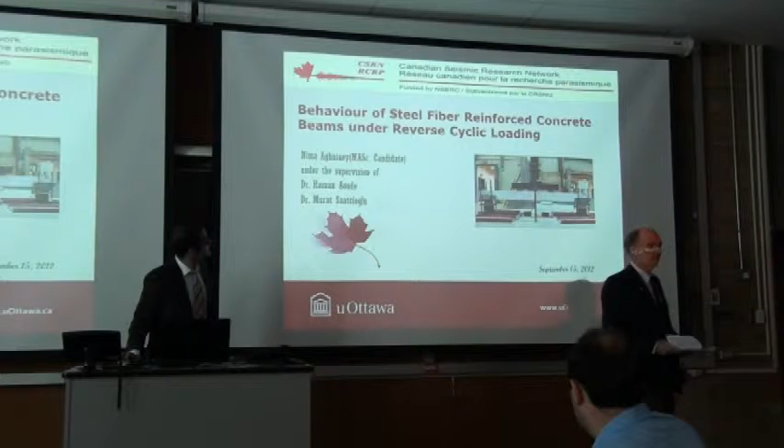Hello everyone, my name is Nima Aghniaey. I'm a master's student at the University of Ottawa, and today I'll be talking about my experimental project: the behavior of steel fiber reinforced concrete beams under reverse cyclic loading.

First, I'm going to give you a little background information, then we're going to move to the use of steel fibers in beams, then discuss my experimental program, and then talk about the results and some conclusions.

Steel fiber reinforced concrete has been around for about 20 years now, and it's basically a composite material composed of regular Portland cement concrete and short discrete steel fibers. As you can see, they come in different types and shapes, with different cross sections and different length or geometry.

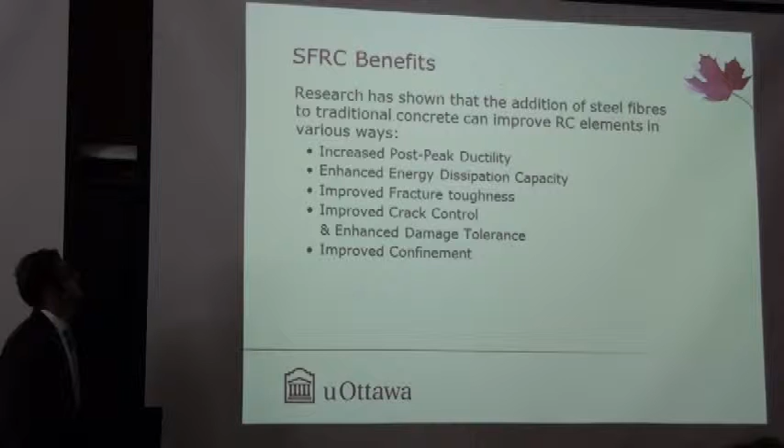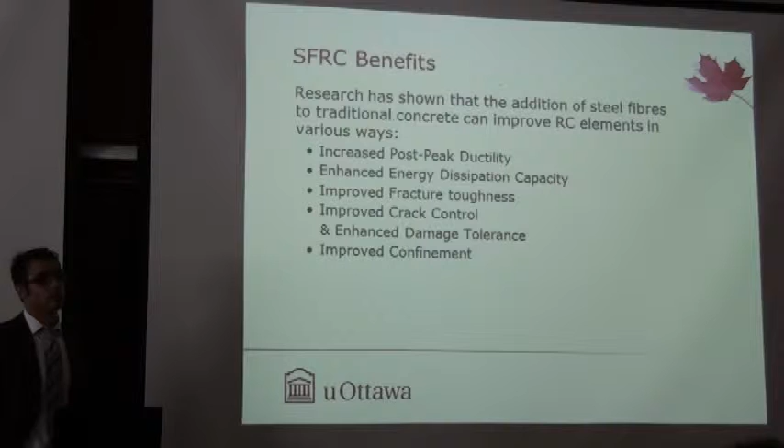The benefits of SFRC has been shown in several past research studies. It's been shown to increase the post-peak ductility, the energy dissipation capacity, improve the fracture toughness, and also improve the crack control and damage tolerance of structural elements. It also improves the confinement of structural members.

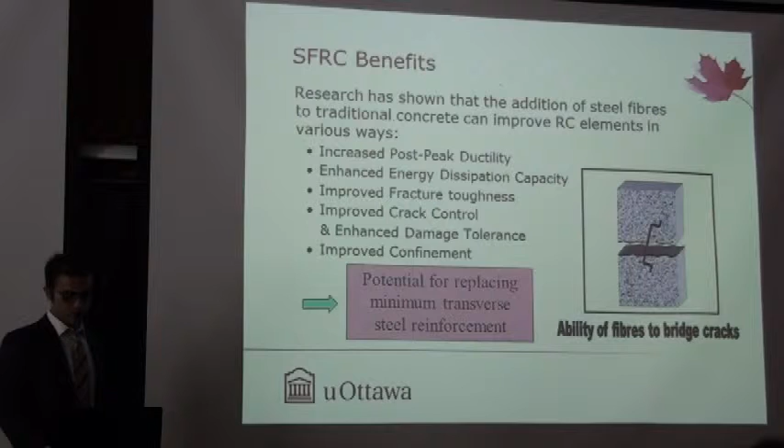Fibers have the ability to basically bridge cracks, which prevents the cracks from opening up, which increases the tensile strength of concrete, and it also has a potential for replacing traditional transverse reinforcement in concrete structures.

The objective of my research program was to study the effects of steel fibers in beams under reverse cyclic loading, and also to examine the potential of steel fibers to replace transverse reinforcement.

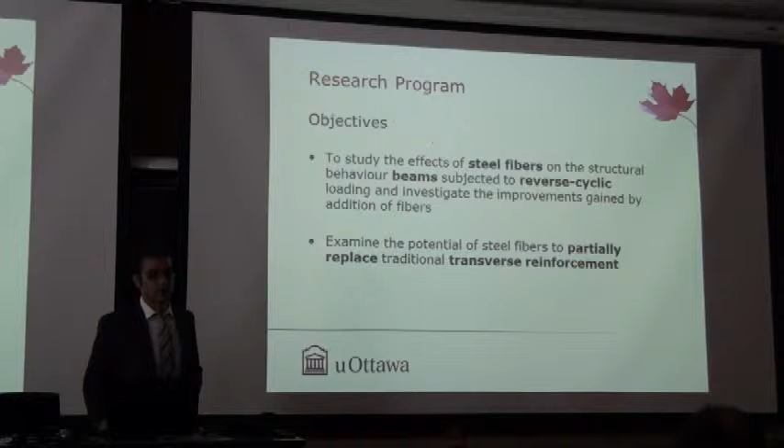As in most experimental research programs, we had to prepare the beams as testing specimens. So we started with the beam design, built the formwork and the reinforcement cages, and did the casting in the structural lab at the University of Ottawa. Then we did the instrumentation for measurement devices, the loading setup, and then started testing.

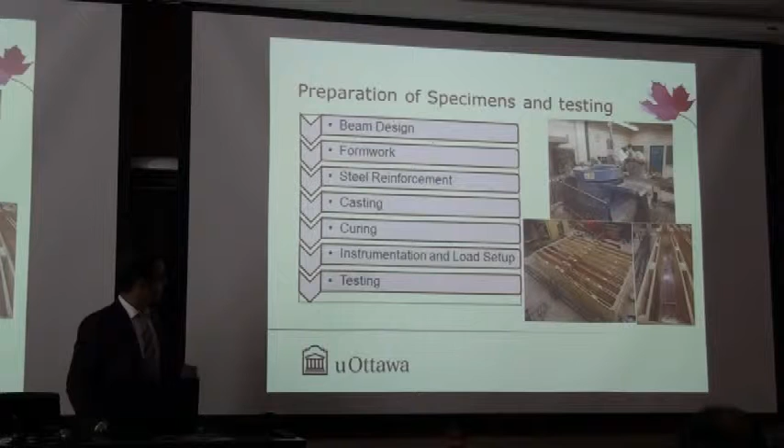You can see my formworks and cages in the bottom there, and the mixer that I used for preparing the beams.

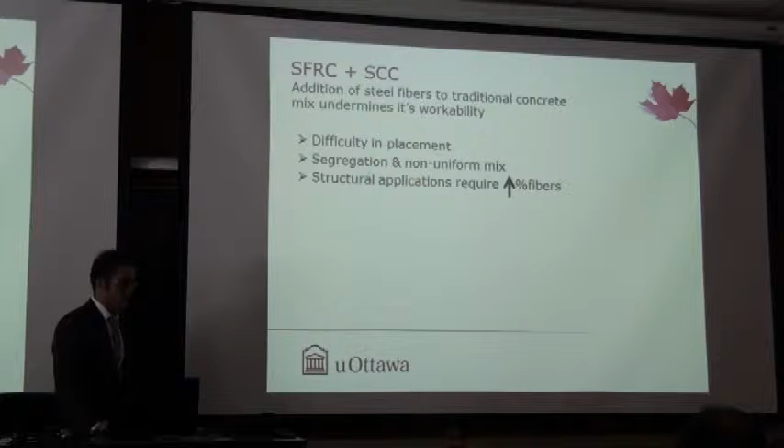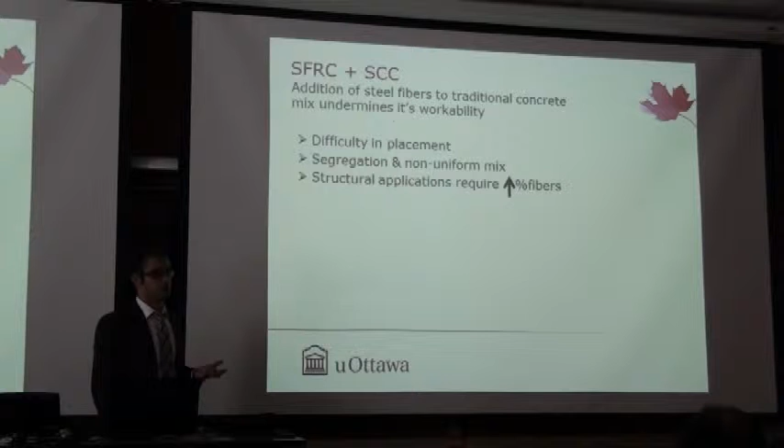SFRC and SCC. SCC, as you probably know, is self-consolidating concrete, and SFRC is just normal concrete with steel fibers added to it. But the problem with SFRC alone is that when you add steel fibers at higher contents, it loses its workability, so it's hard to work with in most structural applications, which require around 1 to 1.5% steel fibers.

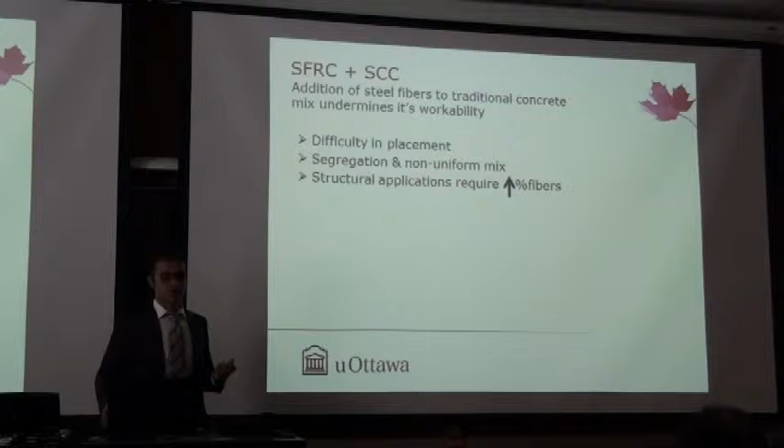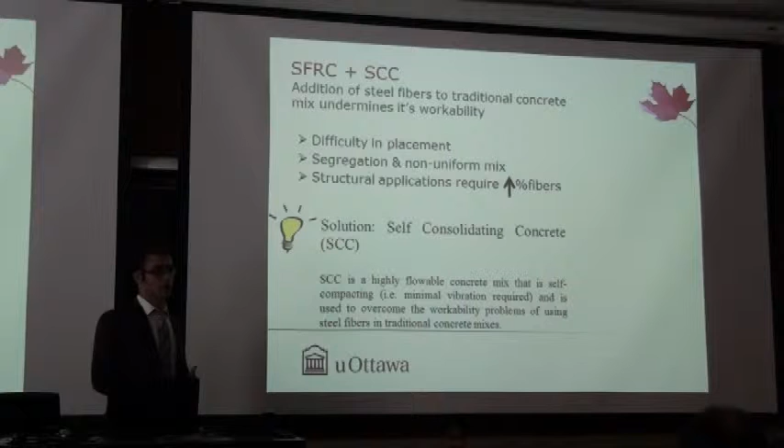To solve this problem, we combined the SCC with steel fibers, which gave us a more workable mix with a bunch of benefits. It was very workable, you could use it in a lot of different structural applications, and you needed a lot less vibration.

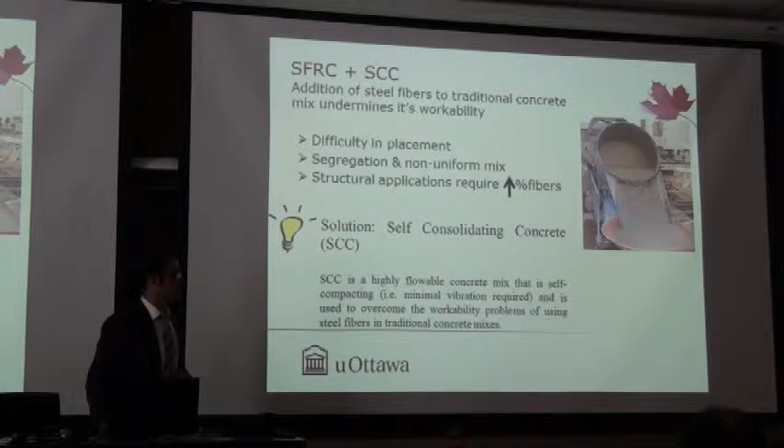You can see that's a slump flow test, which is usually conducted to measure the workability of the SCC, and that's when we're doing the SCC mixes.

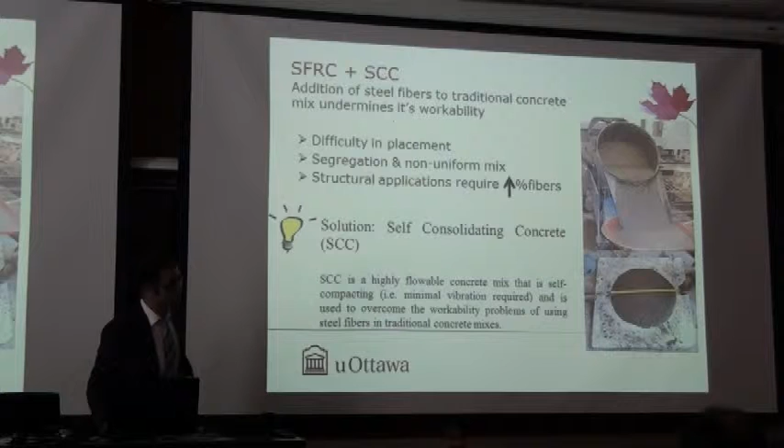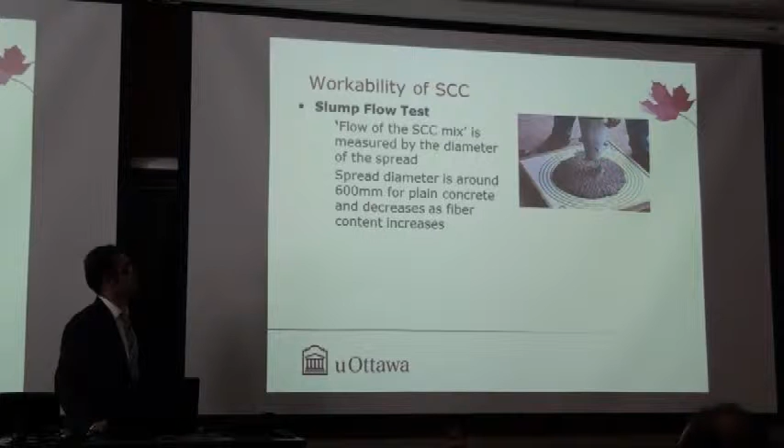As I mentioned, the slump flow test is used to quantify the workability of SCC mixes. You basically measure the diameter of the spread, and for normal SCC with no steel fibers, the diameter of the spread is about 600 millimeters.

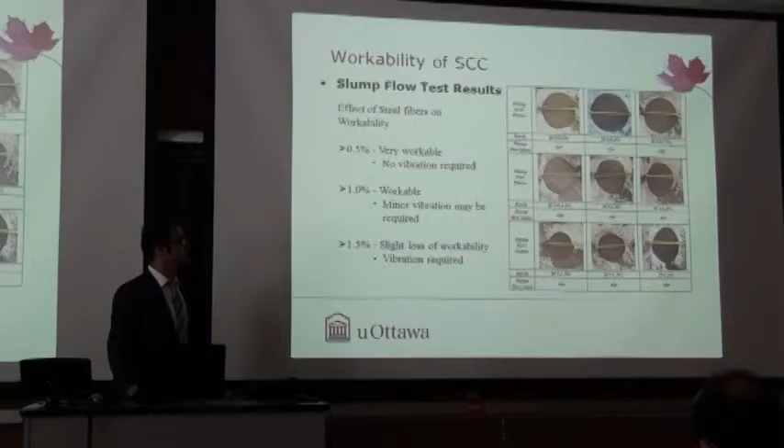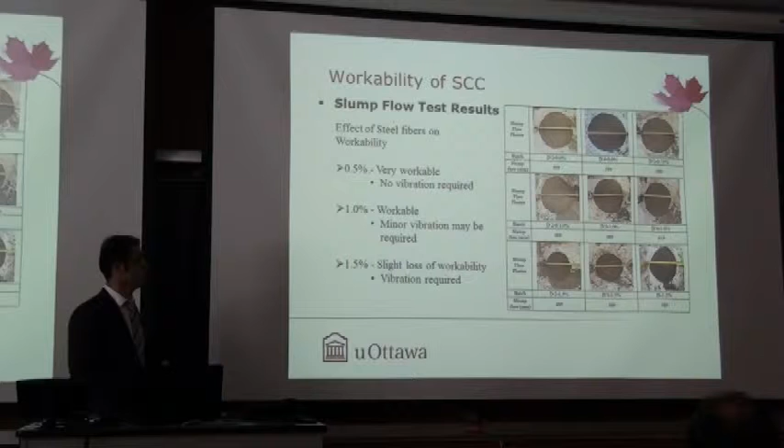When you add steel fibers, it reduces to about 400 to 500 millimeters, depending on the amount of fibers. At 0.5%, it's very workable, no vibration required. At 1%, it is still workable, minor vibration may be required. And at 1.5%, it loses a little bit of workability, and you will need vibration during casting.

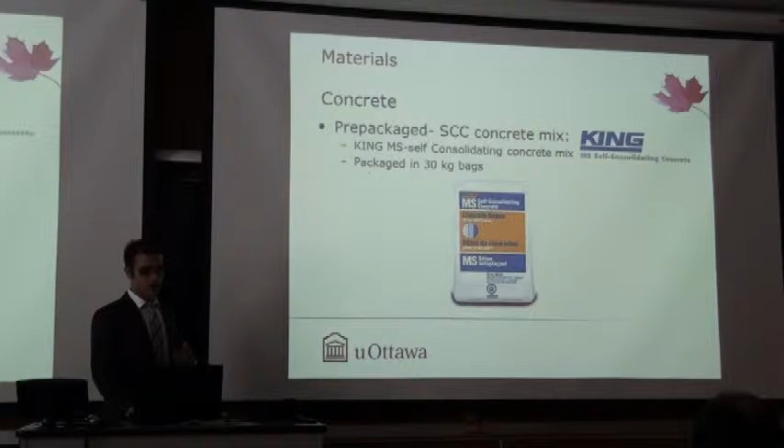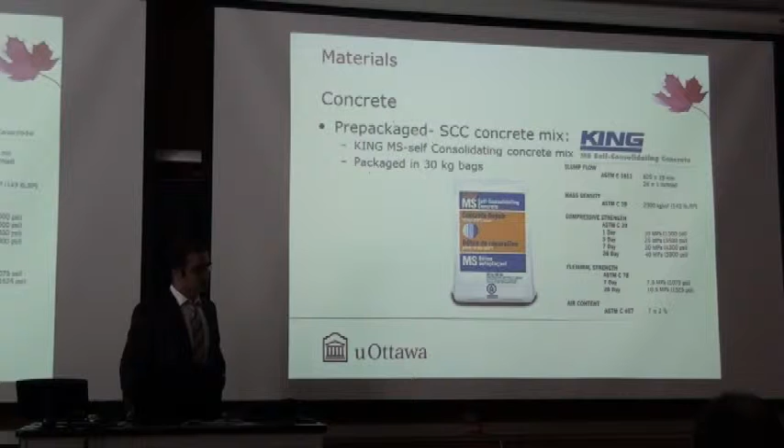We used the King MS SCC concrete mix, which came in 30 kilogram bags. It's pre-mixed, so it's pretty easy to work with - we basically add water to it and cast the beams. Here are some details of the mix.

We used hooked end steel fibers, Dramix ZP305 type. Tensile strength is pretty high, 1,345 MPa. The length is 30 millimeters, diameter of 0.55 millimeters, which gave us an aspect ratio of 55. It also came in packages of 20 kilograms.

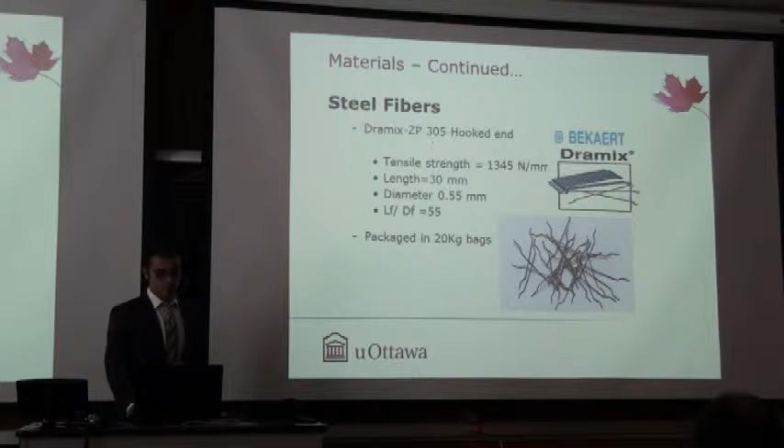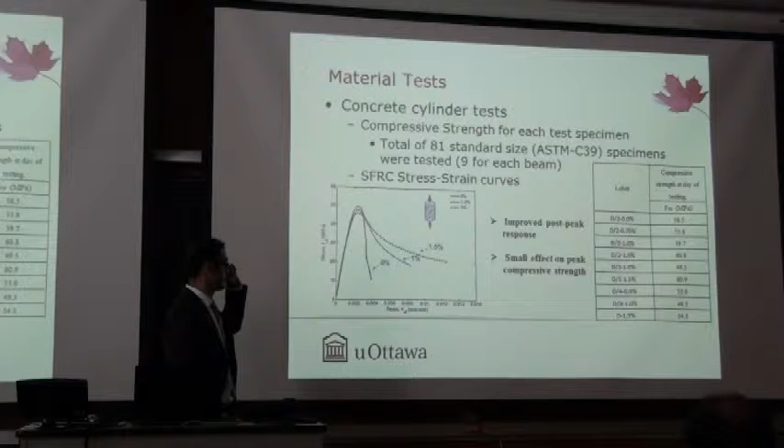We did some material testing. Basically, we did 81 standard size concrete cylinder tests, and we also got some full stress-strain diagrams for the concrete tests. You can see in that table the compressive strength for the concrete used in all of my specimens, and also this stress-strain diagram.

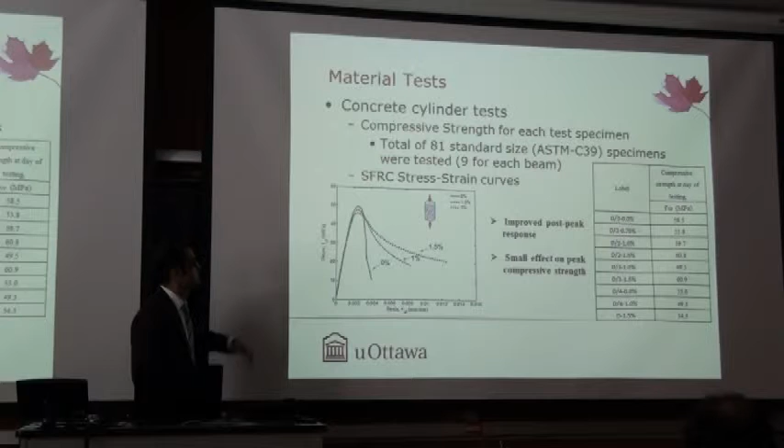You can see the improvement in the post-peak behavior of the SFRC, with the most improvements in concrete with 1.5% steel fibers.

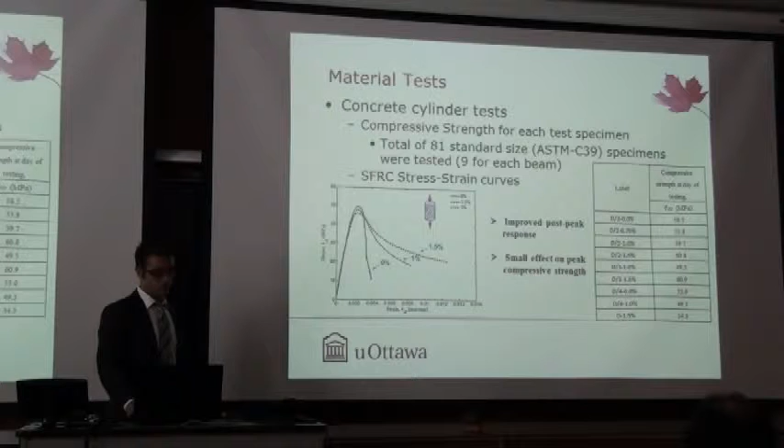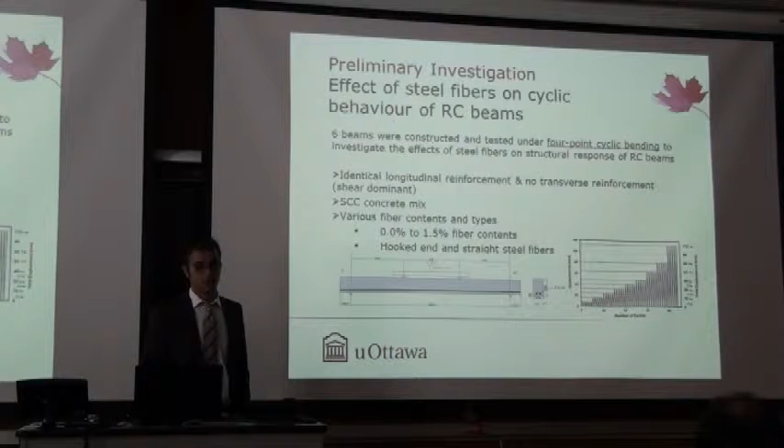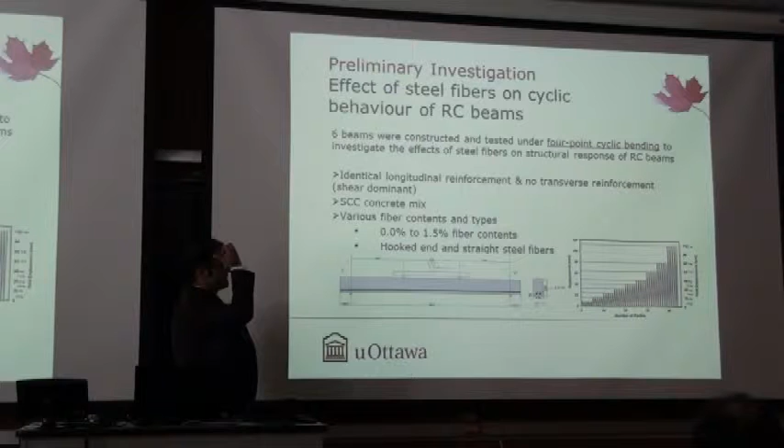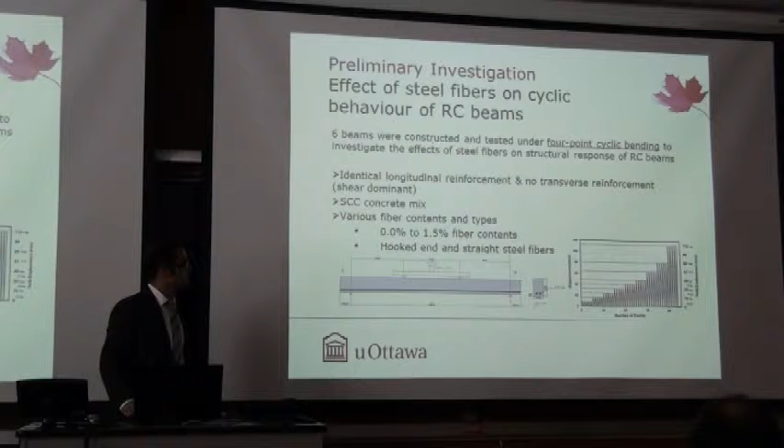Before starting my main experimental program, we did some preliminary investigation. We tested 6 beams with different steel fiber contents and different fiber types - hooked end and straight steel fibers, and 0% to 1.5% fiber contents. It was a cyclic loading test, so it was loading and unloading in one direction only.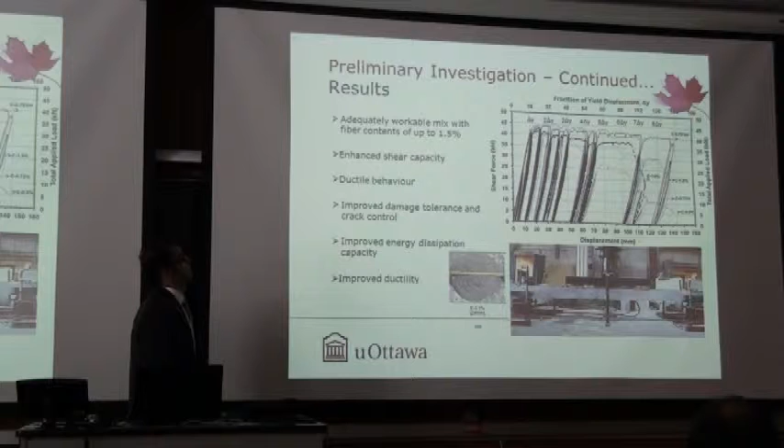Here you can see the cyclic load displacement curves. We observed a huge, significant improvement in the shear capacity of the beams because of the steel fibers. There was an improved energy dissipation capacity of all beams reinforced with steel fibers, improved ductility, improved damage tolerance and crack control, and more ductile behavior.

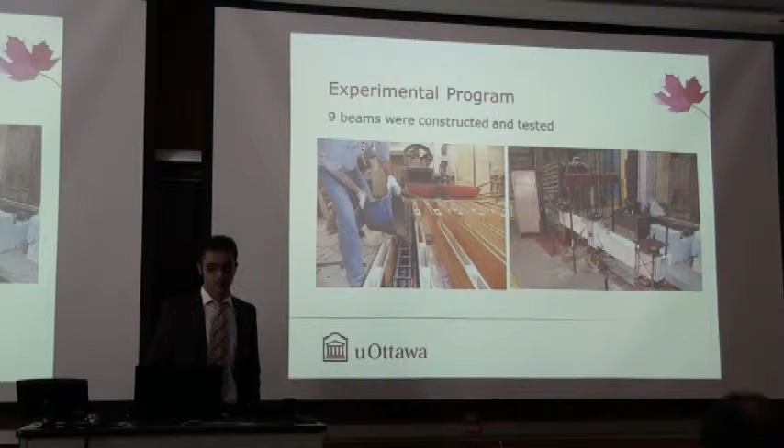My main experimental program consists of constructing 9 beams with different steel fiber contents, varying from 0% to 1.5%. We constructed 2 control specimens with 0% fiber, with identical longitudinal reinforcement.

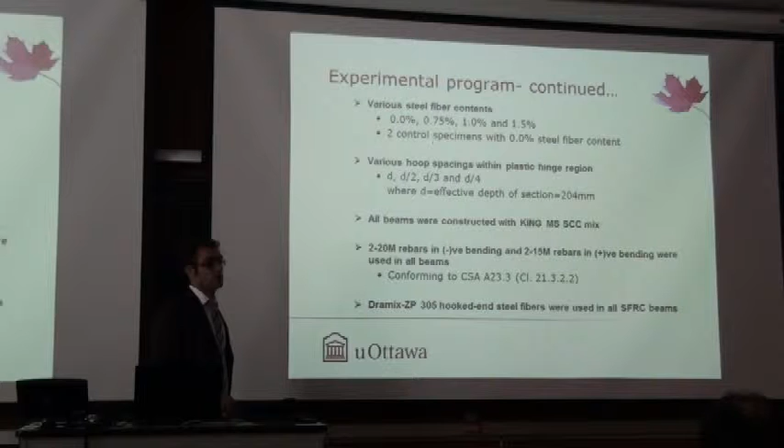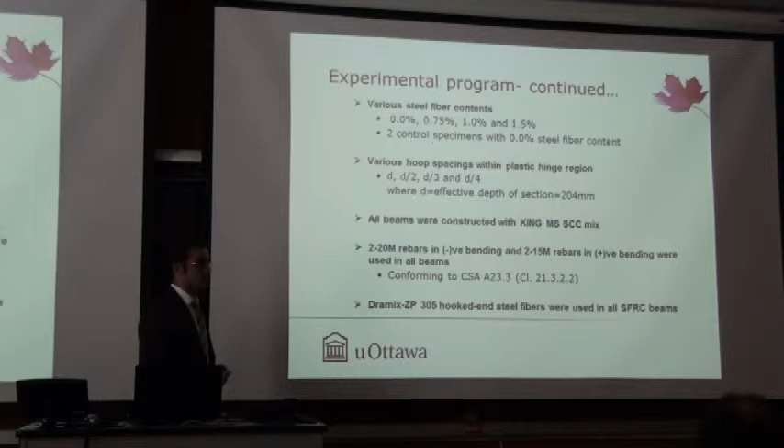We also used various hoop spacings, varying from D to D over 4, where D was the effective depth of our section, around 204 millimeters. This was to investigate the effects of hoop spacing on the properties of the structural section as well as the effect of the steel fibers.

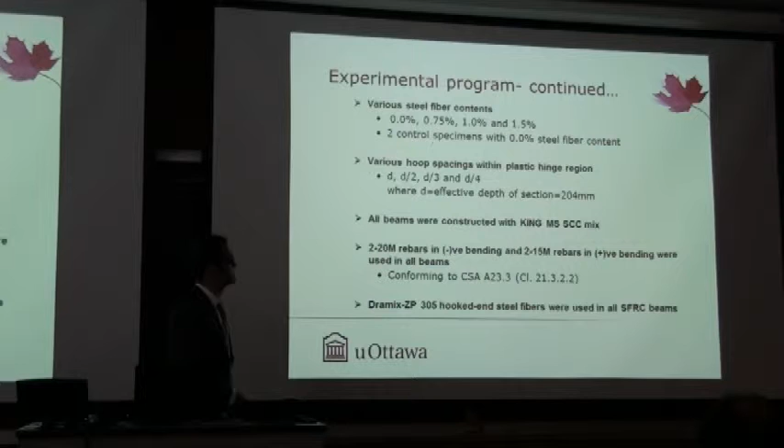As I mentioned before, we used the King MS-SCC mix and the Dramix ZP305 hooked end steel fibers. We only used one type of steel fibers in all of our beams. All of the beams were designed to conform to CSA A23.3 clause 21.3.2.2, which basically states that the positive

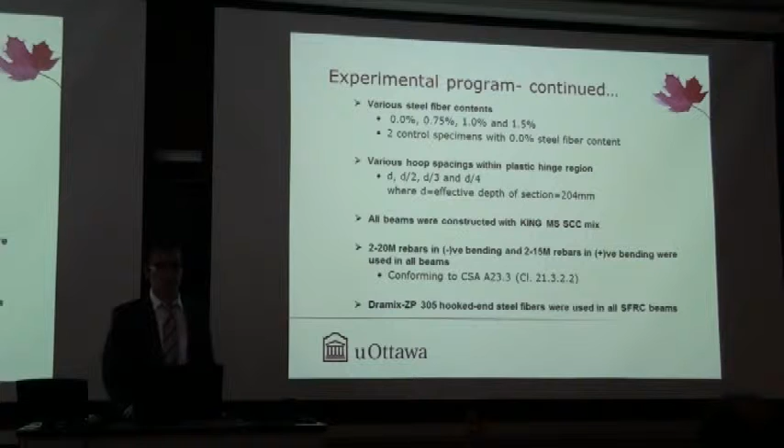We placed steel strain gauges in the longitudinal steel reinforcement as well as the hoops. We had displacement cable transducers to measure the rotation of the plastic hinge as well as the rotation due to anchorage slip and the shear deformations. We also measured the vertical deformation.

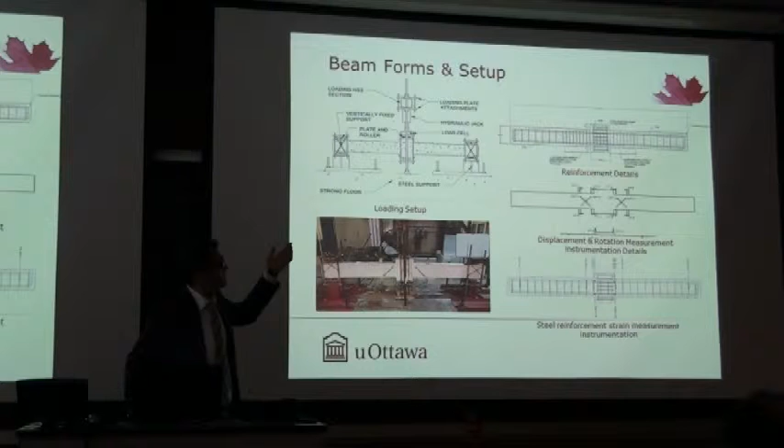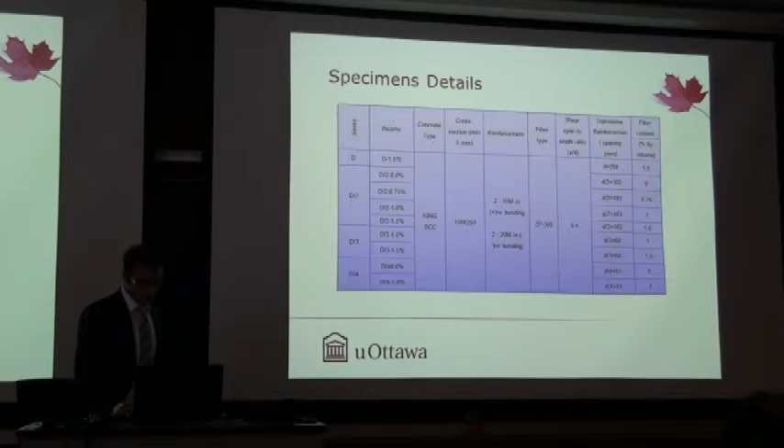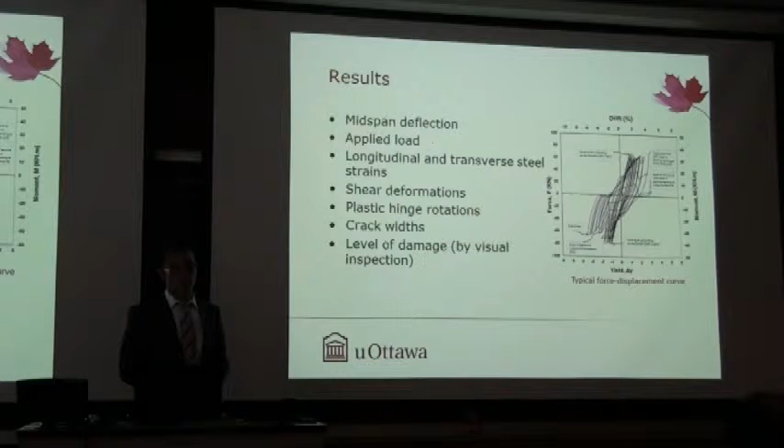As far as the results, we obtained a lot of data from tests, including midspan deflections, the applied load, which was measured by means of a load cell, longitudinal and transverse steel strains. We measured shear deformations, plastic rotations, crack width, and also assessed the level of damage to our specimens by visual inspection.

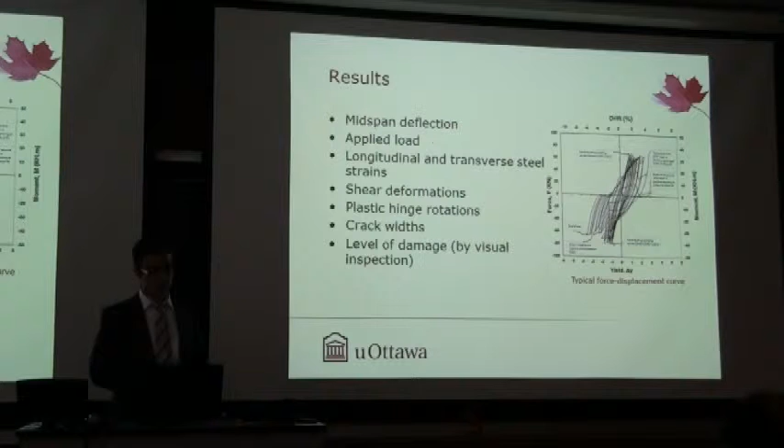As a first step, we did the load force displacement, and by doing that we tried to compare the improvements resulting from the application of steel fibers. Those are the force displacement diagram areas, basically areas enclosed by force displacement diagrams for my D/2 series, and we observed that the energy dissipation capacity for beams with higher steel fiber contents increases.

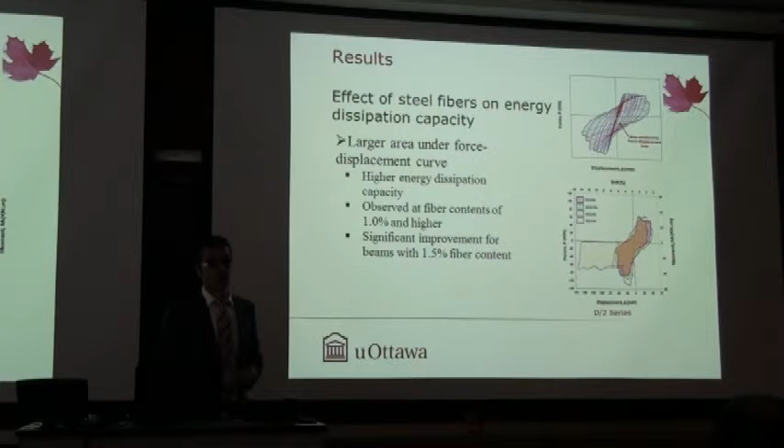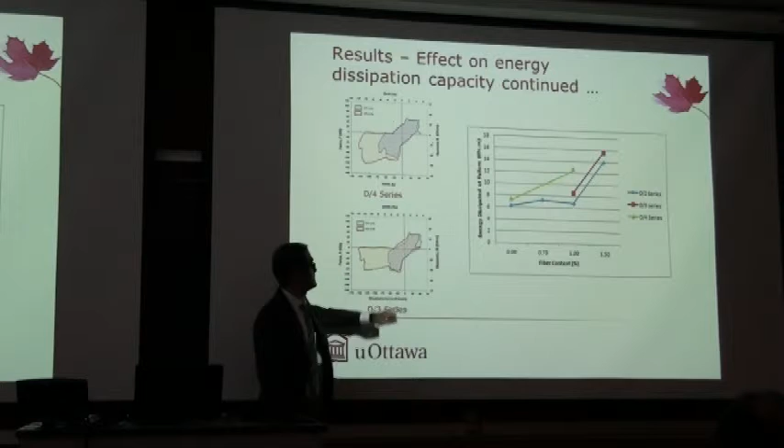As you can clearly see in the diagrams for my other beams, the hoop spacings are the same, and we are only increasing the fiber content. As you can see, the area under this diagram, which is my D/3 beam with 1.5% fiber, is a lot larger than my D/3 beam with 1% fiber.

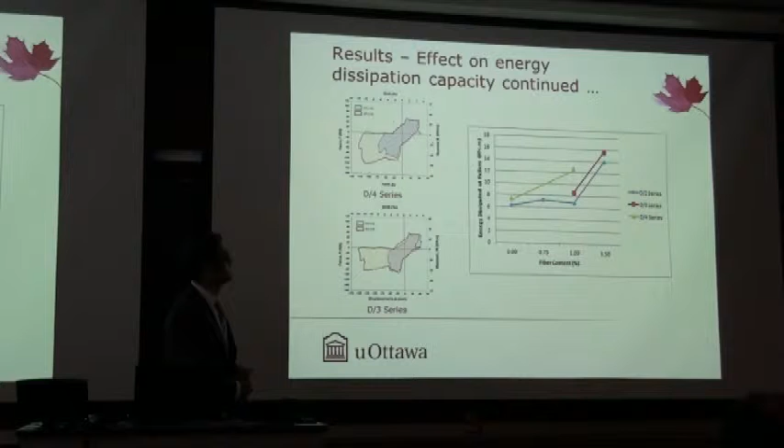Again, in that diagram you can see the improvement in energy dissipation capacity of the beams. The only exception to that was my D/2 1% specimen, which has a slightly lower energy dissipation capacity compared to the specimen with 0.75% fiber.

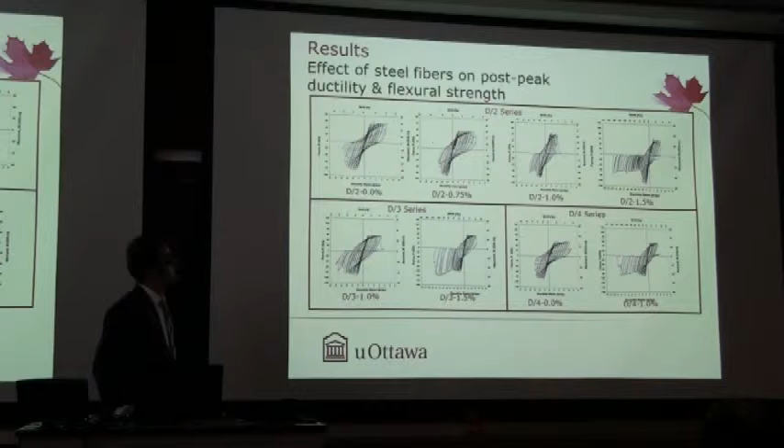Flexural strength of the beams were also improved by addition of steel fibers, as you can see here. Comparing the SFRC beams with the control specimen, we can see improvements in all beams except the D/2 1% beam, which seems to be my specimen with a few problems. But in all the other beams, especially D/3 1.5%, we had a huge improvement.

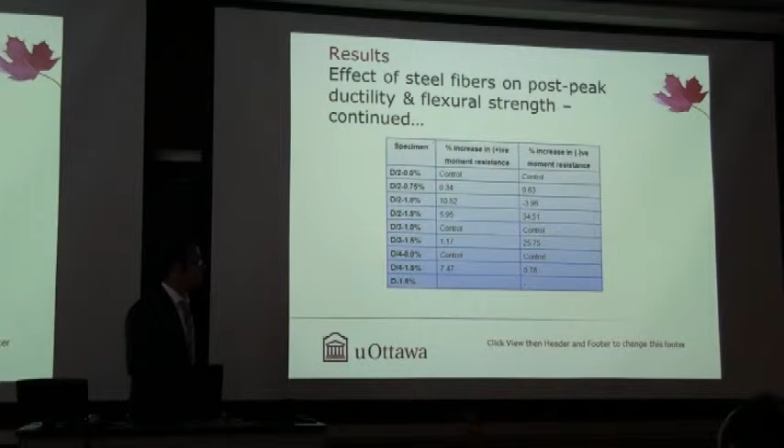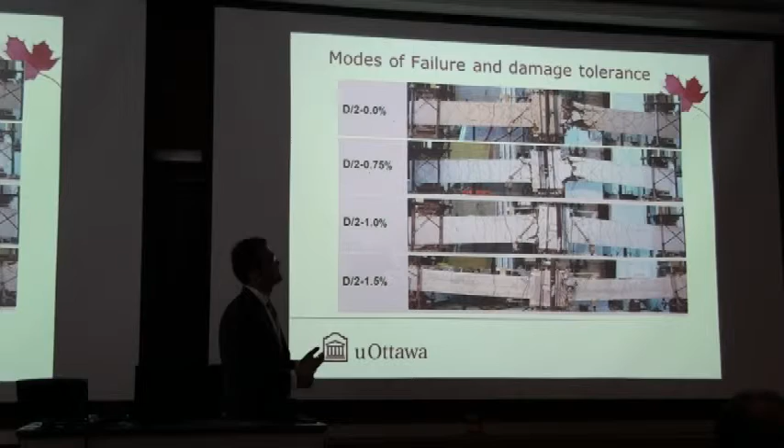All of our beams failed in flexure, as we expected. The span to depth ratio was designed such that the shear strength would not be that significant, so our beams would fail in flexure.

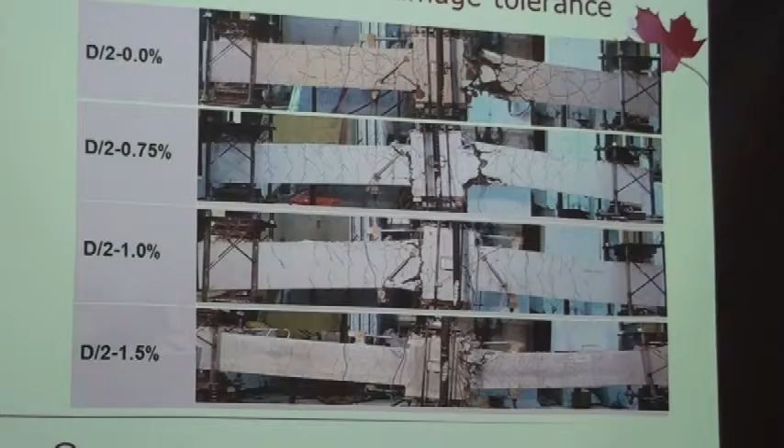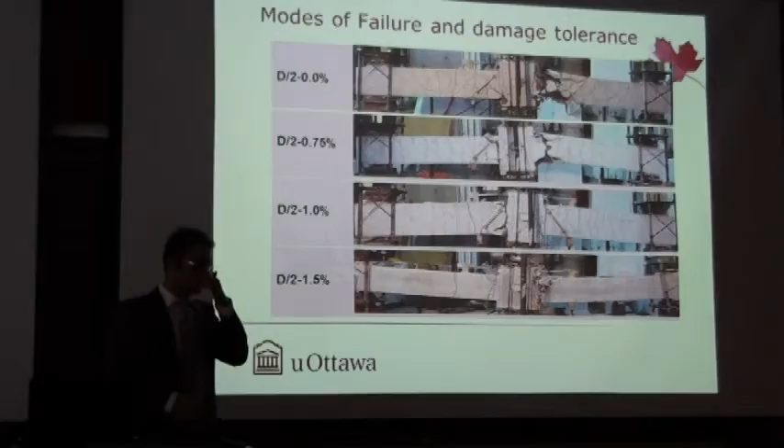There has been a lot of research by several researchers investigating the effect of steel fibers on shear strength of beams, but we haven't seen a lot of research studying the effects of steel fibers on flexural behavior of concrete. That's why we tried to have our beams fail in flexure.

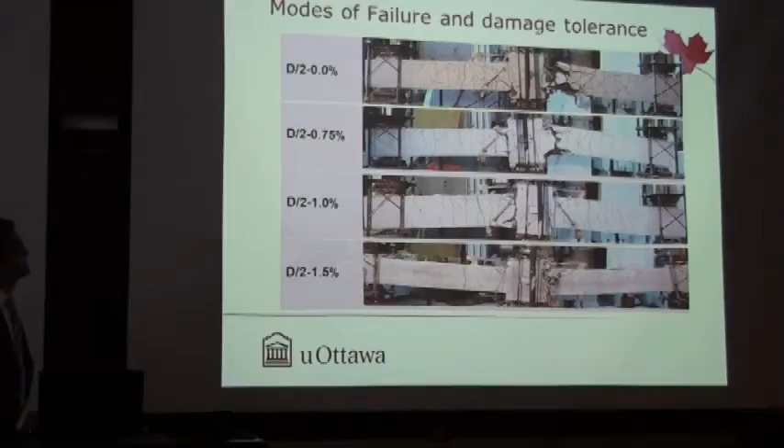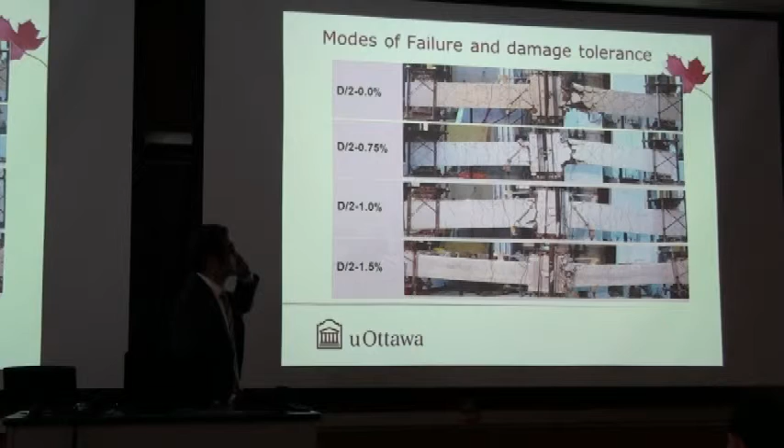As far as damage tolerance, you can see this is my D/2 series, so they all basically have the same hoop spacings and different fiber contents. As you can see, as the fiber content increases, we see less spalling, less material loss, and smaller cracks. This is the D/2 1.5% specimen compared to D/2 0%.

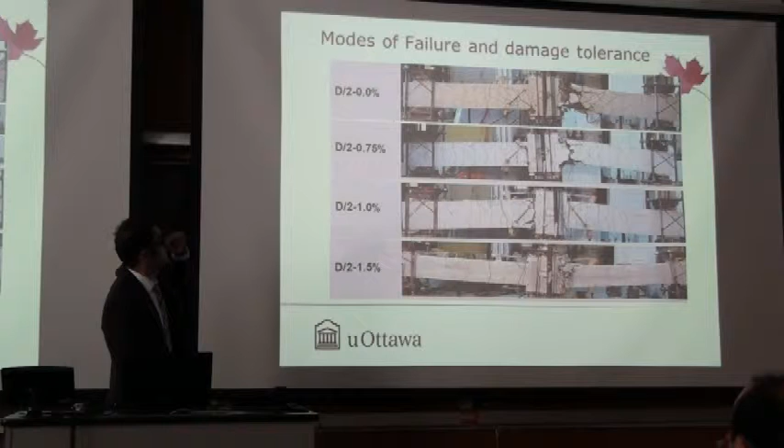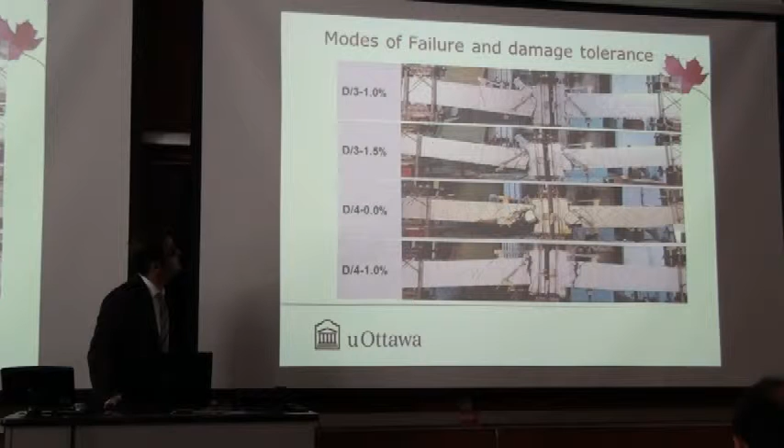This is the D/3 and D/4 series. Again, the same effect was observed, and I'll show the 1.5% fiber, which was the best one even in that series.

So in all specimens, we observed improved confinement and cover response. We observed improved damage tolerance, which basically meant less spalling and concrete degradation, as we saw in the pictures. And we saw increased toughness, which resulted in delayed crushing of the concrete, so we would have a more ductile response from the beam, and also the buckling...